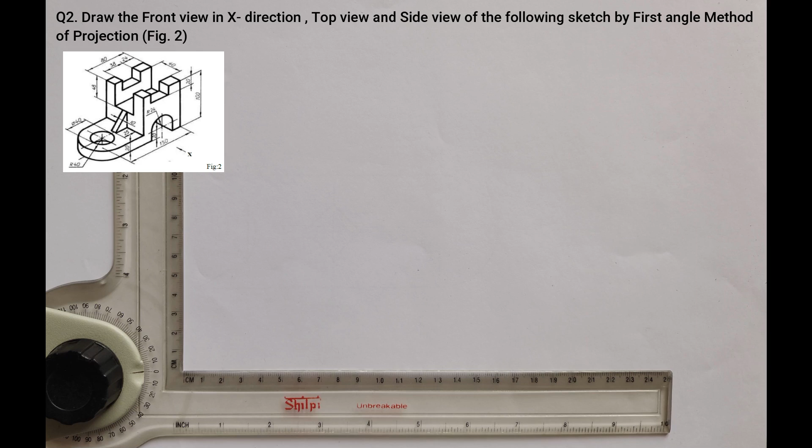As you can see in the question, for this object you will have left hand side view to be drawn, and as per the first angle projection method, left hand side view is always drawn on the right side of the front view.

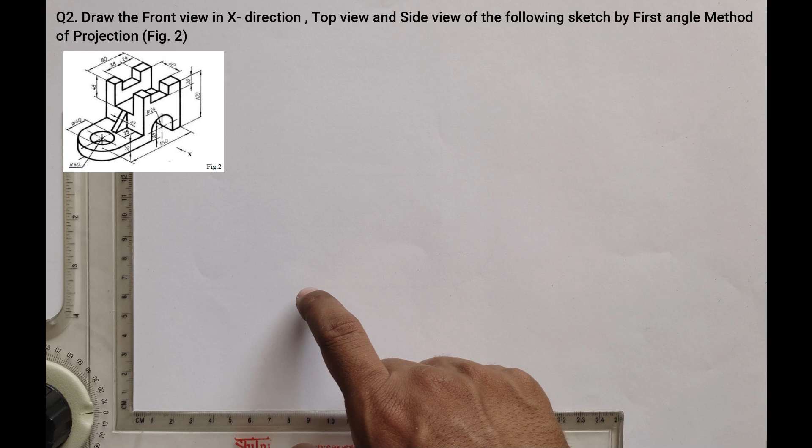So here, before drawing the horizontal and vertical line, you have to make sure you have sufficient space here to take the length and height of the front view. After drawing this horizontal line, you should have sufficient space to draw the width in top view, and after drawing the vertical line, sufficient space for the width, with the height carried along.

So in order to understand this question better, the length is not completely given directly, but you can calculate it from the left center line to the right corner. It is 130 plus 40 mm, which is the outer radius, so it becomes 170 mm. That is the complete length of the given question.

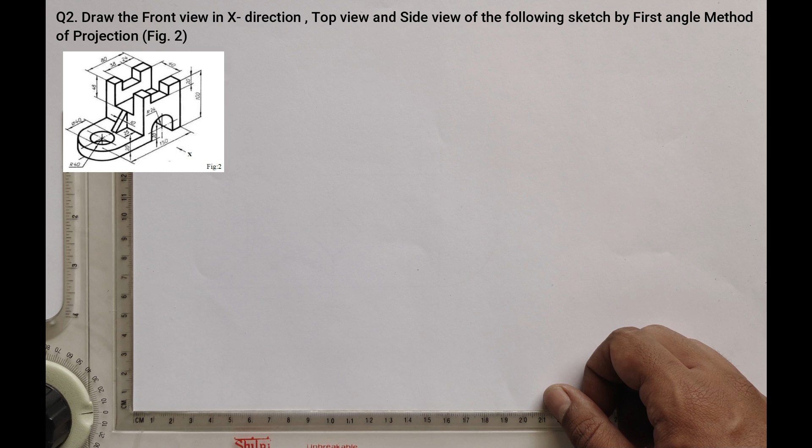The height is 100 mm, whereas the width is 80 mm because of the radius 40 mm.

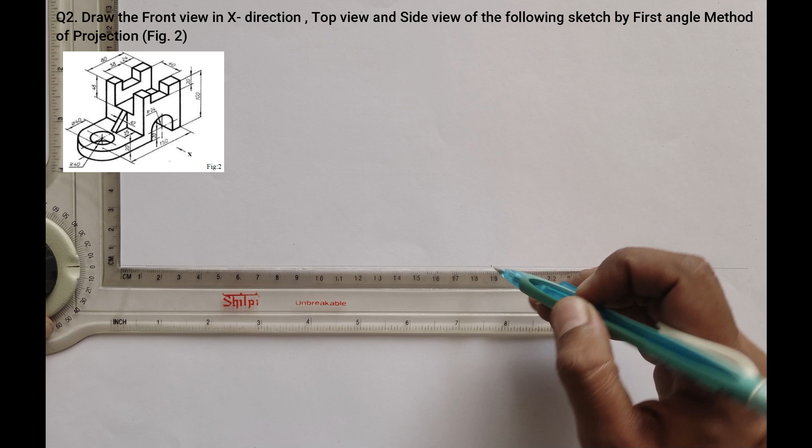So starting with the solution here, you have to keep at least 12 centimeter, that is 120 mm, and draw the horizontal line. Once you have drawn the horizontal line, at least 190 mm should be left on the left hand side in order to draw the front view here. Then drawing the vertical line.

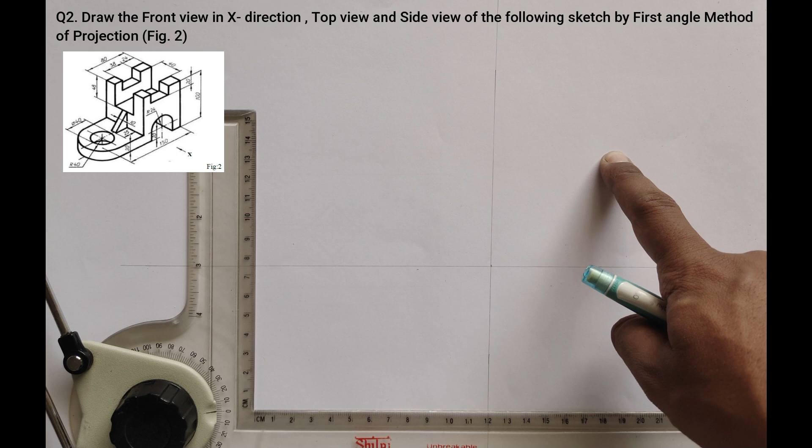So I have drawn these lines. Here you'll have the front view, here top view, and here left hand side view as per the first angle projection method. Now take a common distance from this intersection point on each side, so your front view, top view and side view can easily be drawn.

This distance can be 10 mm, 15 mm, 20 mm, whatever you feel suitable, and can be adjusted on the given page.

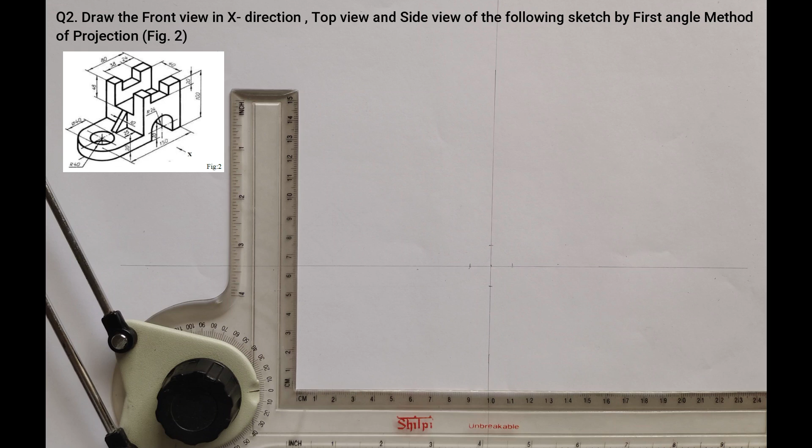So these are the lines which we have drawn.

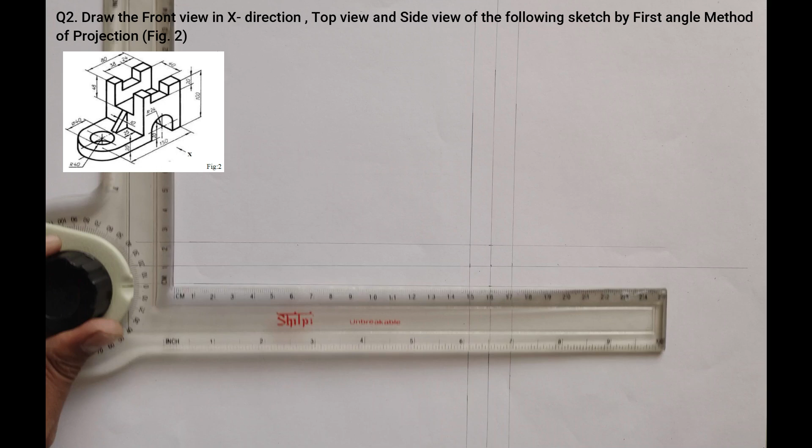Here you have to take 130 mm and locate the center line. After this you have to take 20 mm as the base plate thickness here, drawing it faint here.

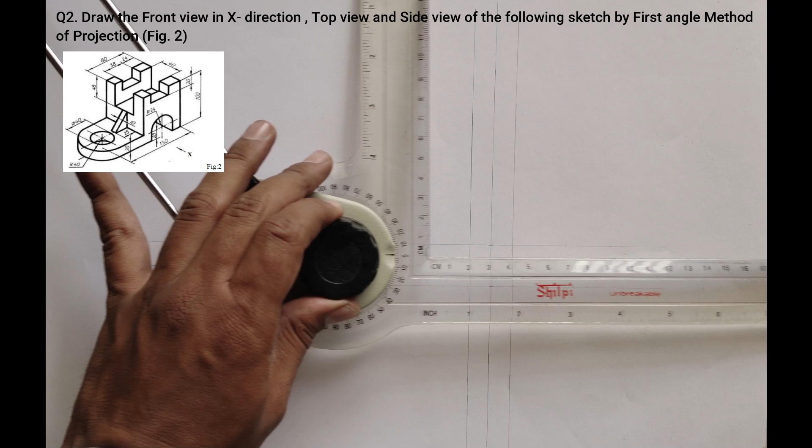The total height of the component is 100 mm, so taking 100 mm here. Up to 100 mm we can make it dark.

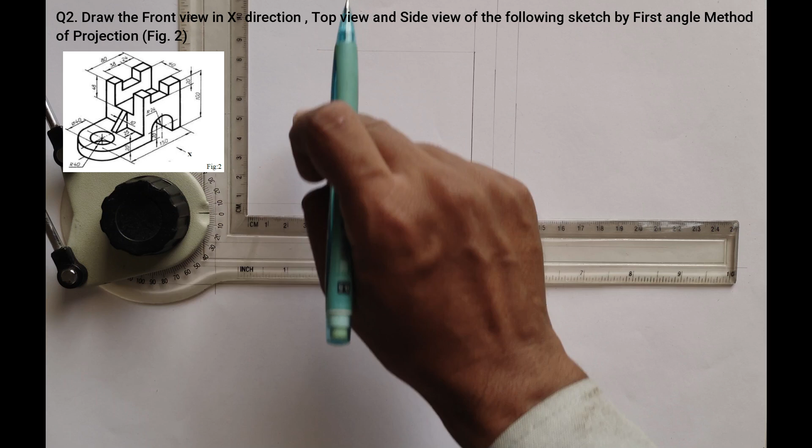Then from there you have to move 80 mm in front, but it's not completely dark, so I'm drawing it faint here, and then it should be dropped here up to the 20 mm base plate, so this can be dark.

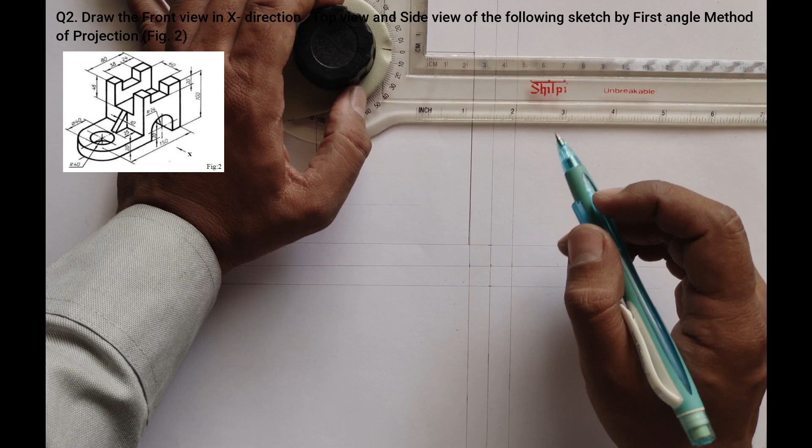Now as far as this portion is concerned, you have to take 24 mm, then you have to drop it by 20 mm as per the given slot here. Then you have to move 38 mm front, closing it on 20 mm here, and the remaining should be dark.

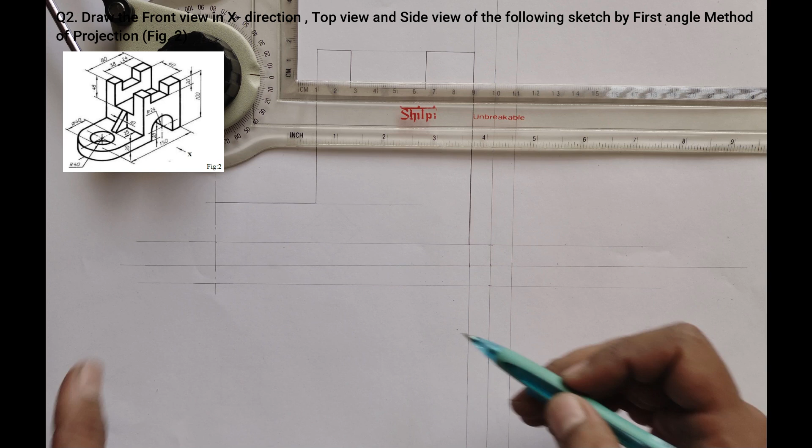Now the semicircular slot here is not having the center at the base, it is 20 mm above, so this is the 20 mm line, making it here the center line, and on this line at the center, that is at 40 mm, you have to draw the vertical center line.

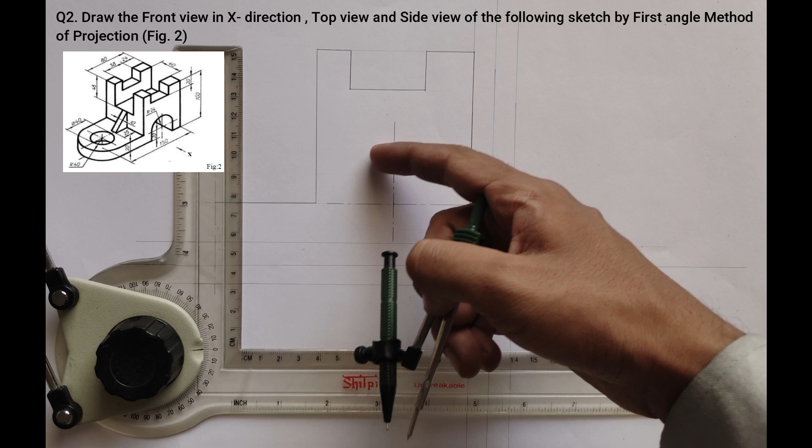Now the radius is given as 24 mm here. We have this 24 mm already drawn, so I'm using this distance as my radius and drawing the semicircle.

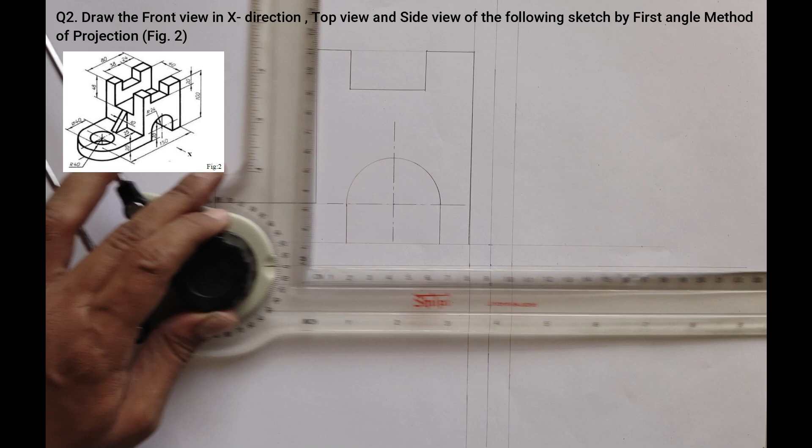Then you have to drop it vertically down till the base plate, and then you can draw the remaining portion dark.

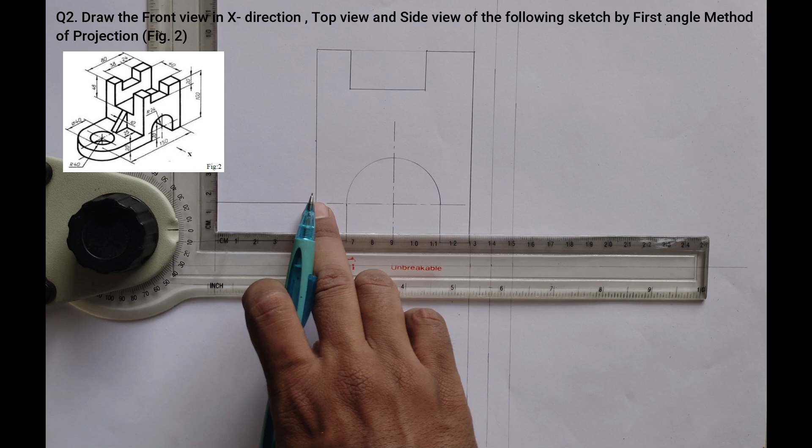Now, here there is a rib given. As you can see, as per the given dimensions, the rib starts from the top. You have to leave a distance of 48 mm, marking the point. And from this corner, it is forward till 25 mm. So from this, you have taken 25 mm.

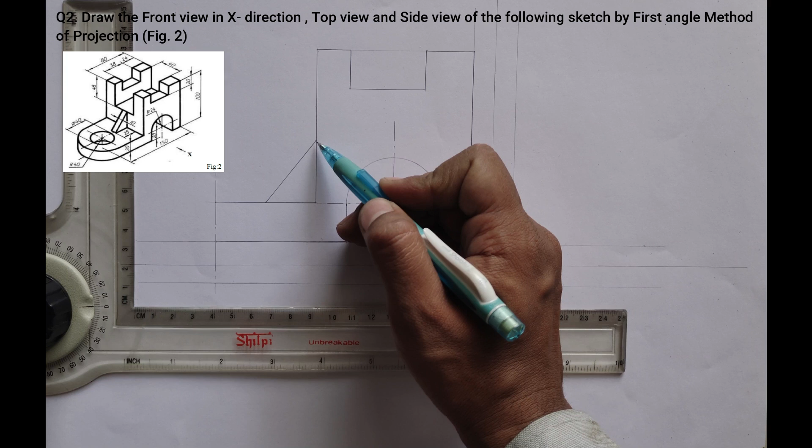This is the point. Now you just have to join these two points, forming the given rib in front view. As you can see, the point where the rib ends at the same location, there is a slot here, so it is not seen in front view. You will have to draw a dash line here.

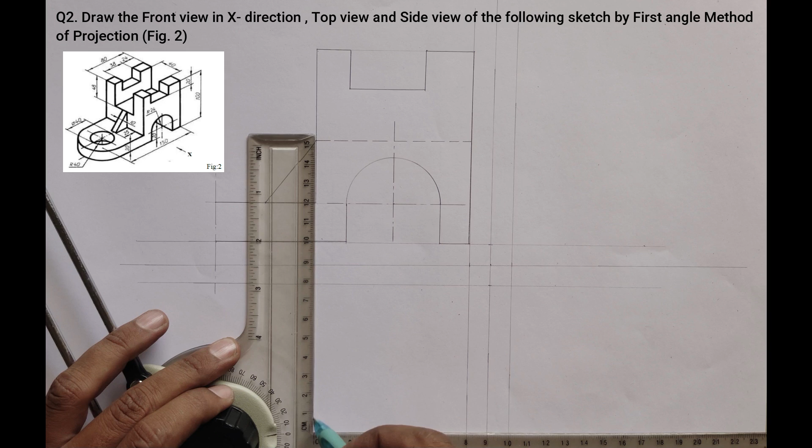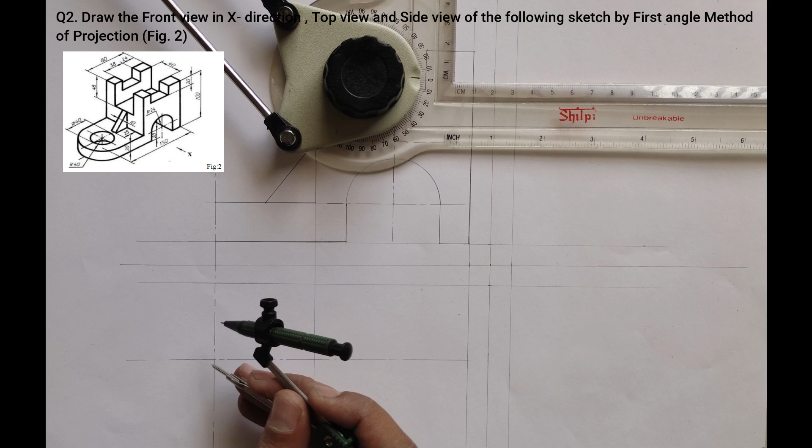For the time being, leave this portion and let us move to our top view. Carrying the projectors down, this is the center line here. You have to take 40 mm distance in order to locate the center line here, so this is 40 mm. You have to take this distance in compass and complete the semicircle here, which will be visible in the top view.

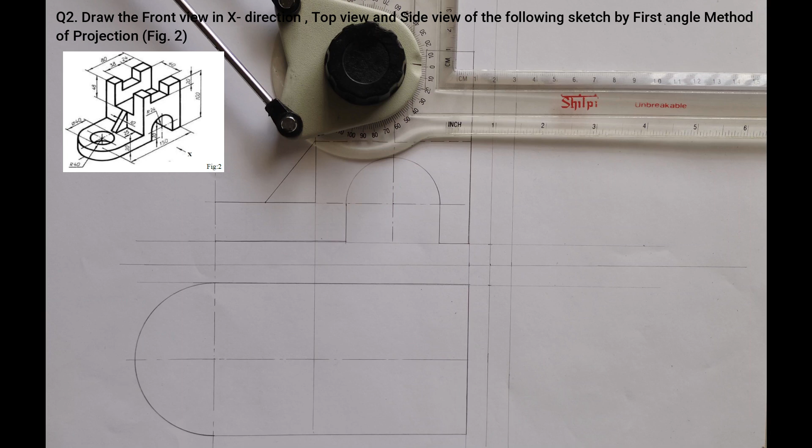Now you can complete this side in order to find the outlines of our given top view. As you can see, at this location there is a circle having a diameter of 40 mm, which means the radius will be 20 mm. This was 20, which we have already taken, so in order to save time, I'm using the same.

Once you have drawn the circle, now we can complete this remaining front view by taking the projectors up.

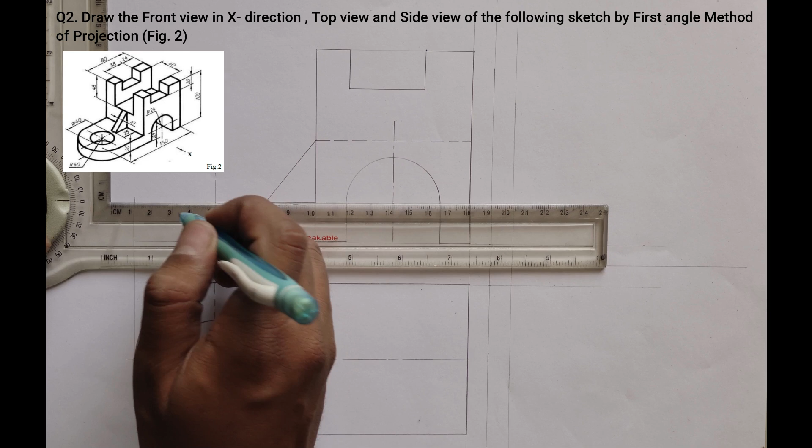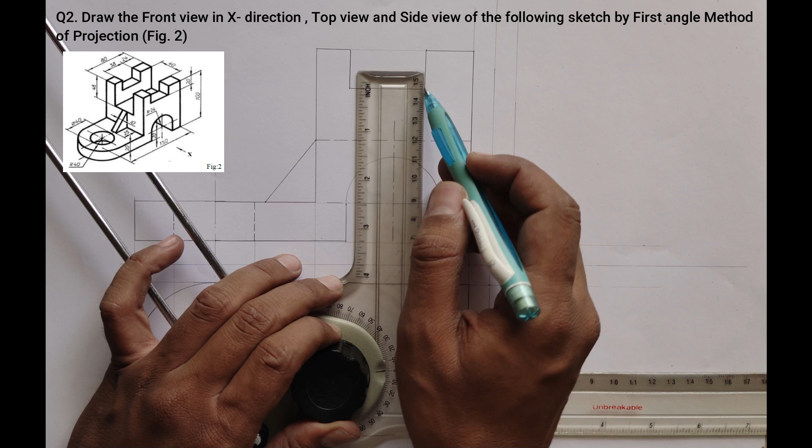Now coming to this portion of top view, as you can see here and here, you will be having some portions as projection. Taking this projectors down, now from the center, the slot width is 40 mm, so 20 mm on each side you have to take.

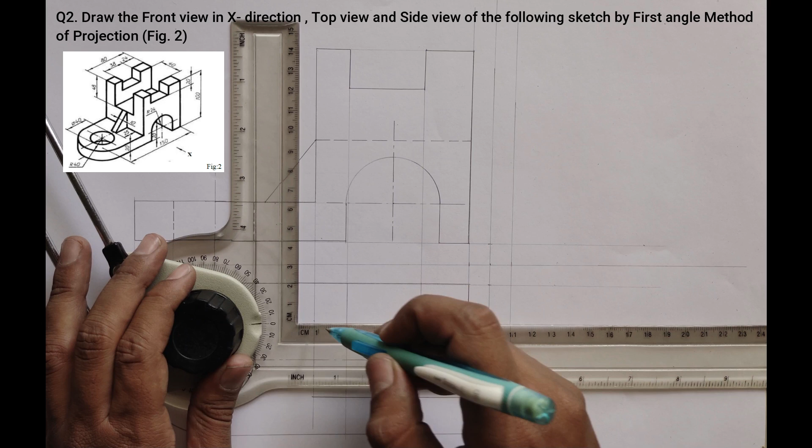This should not be made dark, this should remain faint. Now coming to the rib, it is having a thickness of 10 mm here, so 5 mm on each side, and this is the end point of it.

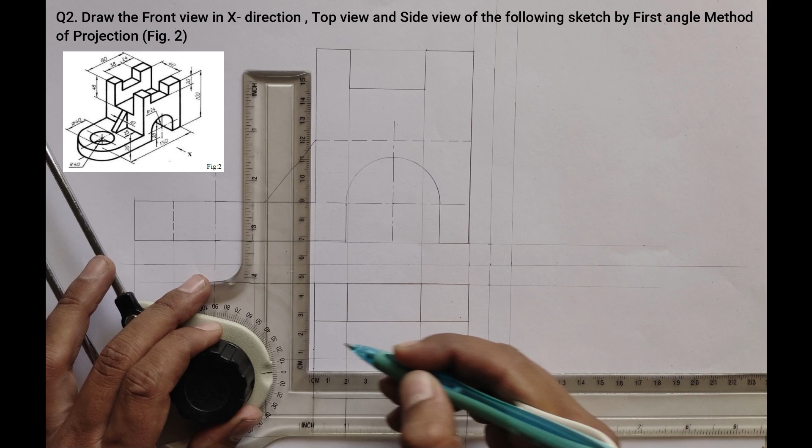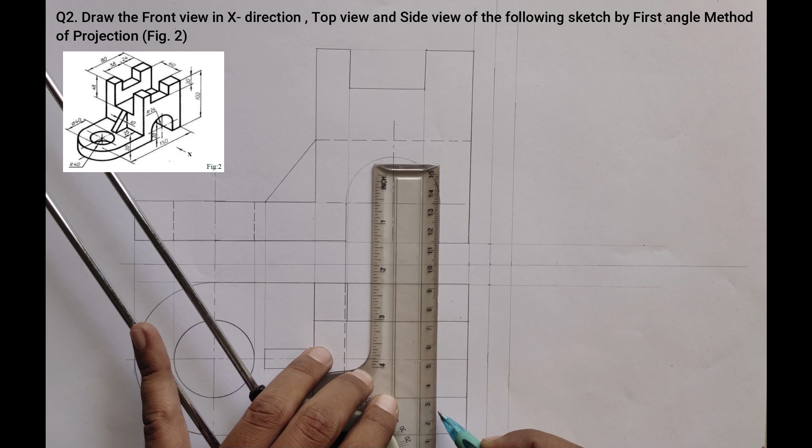Now this semicircular slot will not be seen from top, so it should be dashed throughout. Now this completes your top view.

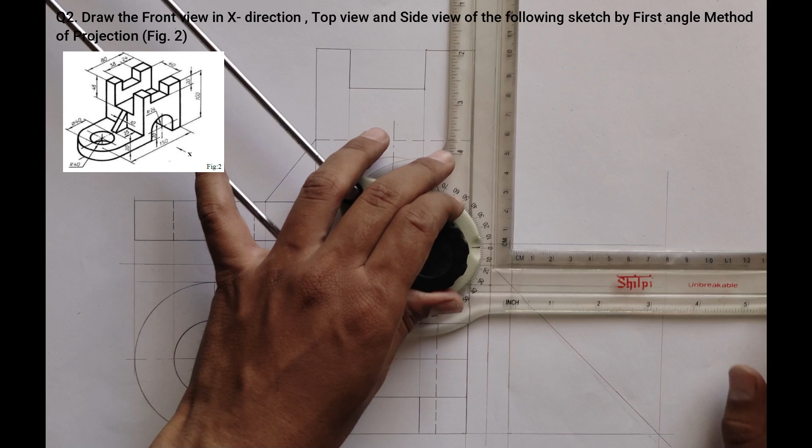Coming to the side view now. You can take an angle of 45 degrees here, taking the height from the front view. So this is the box where you have to draw the side view.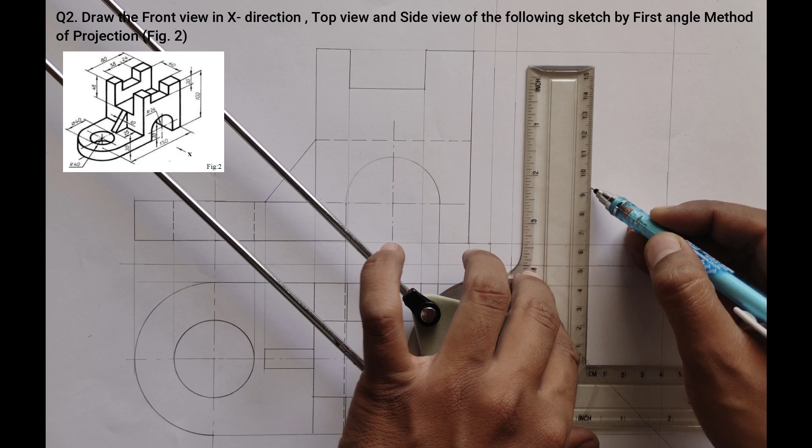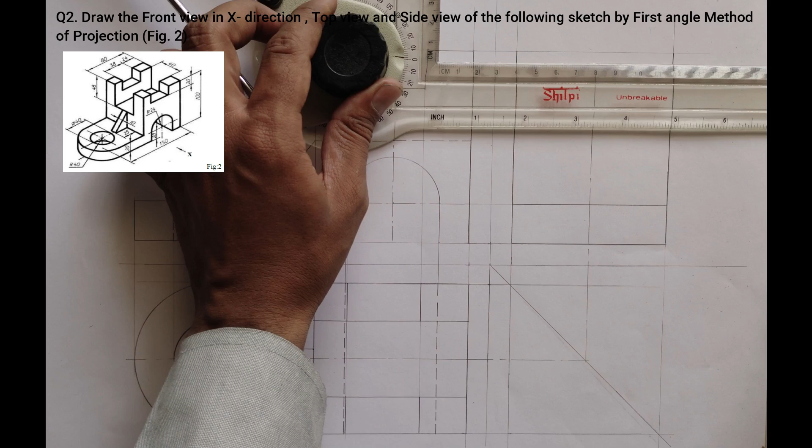As you can see, this base plate will be having dark lines throughout the width, and this vertical line will be dark till the... so for this portion you have to take the projectors from here.

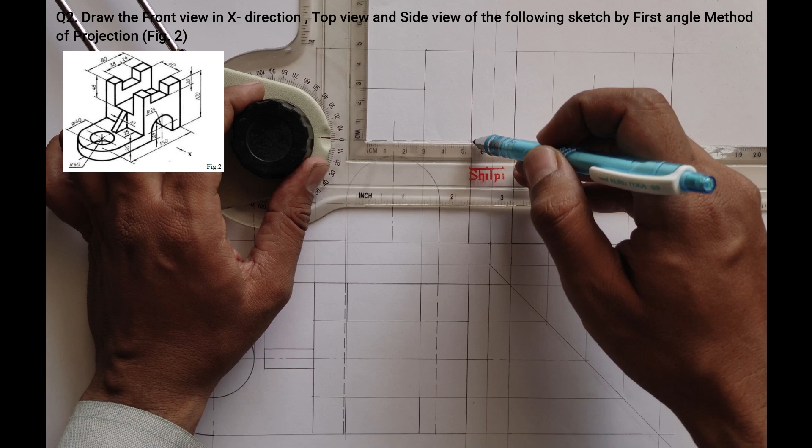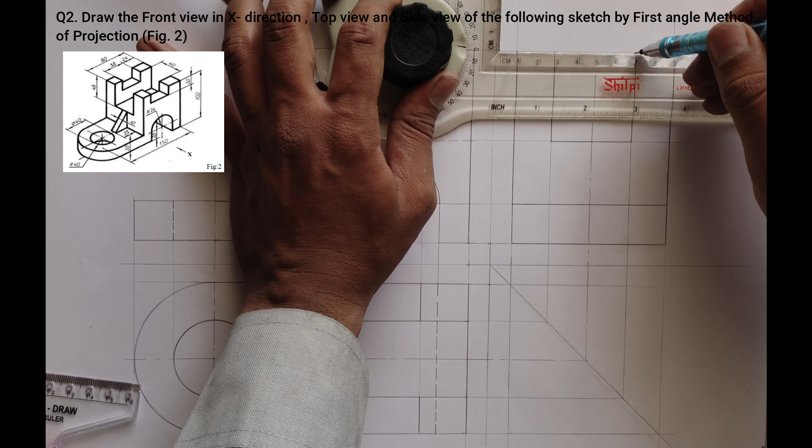These lines should be taken down dark up to the slot. So this is the dash line we are talking about. This is of the slot, so this should be dark here, and similarly this should also be dark. You have to draw this line dark here and the top ends. Now this slot will not be seen from side, so it should be dashed.

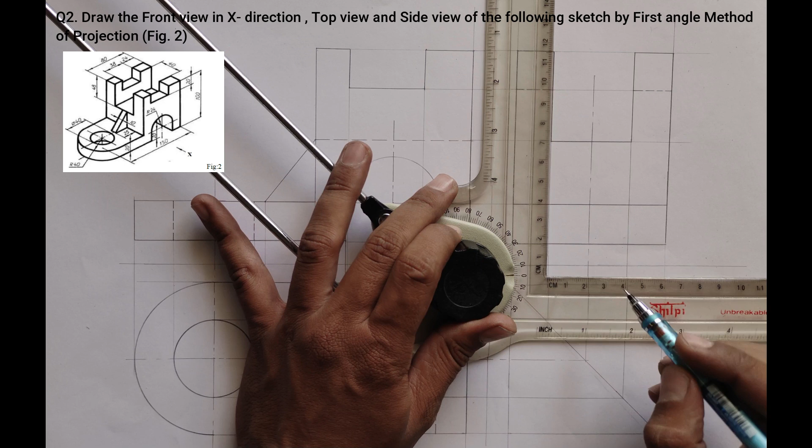So this circle is having a diameter of 40 mm and the slot is also of 40 mm, so it falls on the same projector. Here you have to make this portion as a dashed line.

Now the rib remains, so you have to take projectors of the rib here. It should be starting from this point, ending on this point. So this portion should be dark, the remaining should be faint.

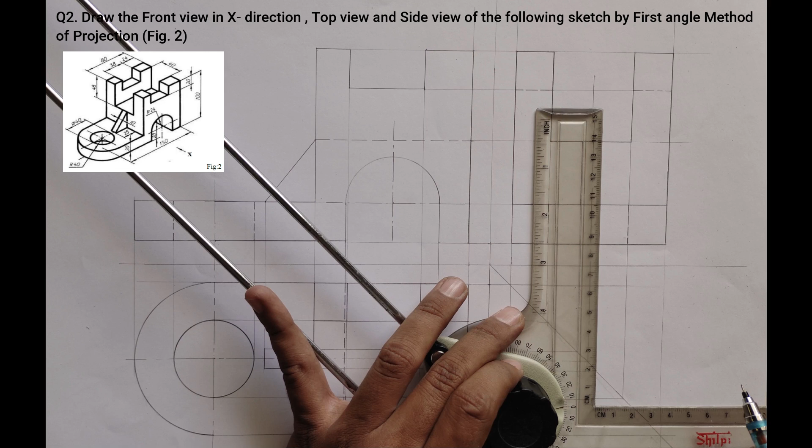Now the slot, the semicircular slot, will be taken from the front view here and it is throughout, so you have to make it dash.

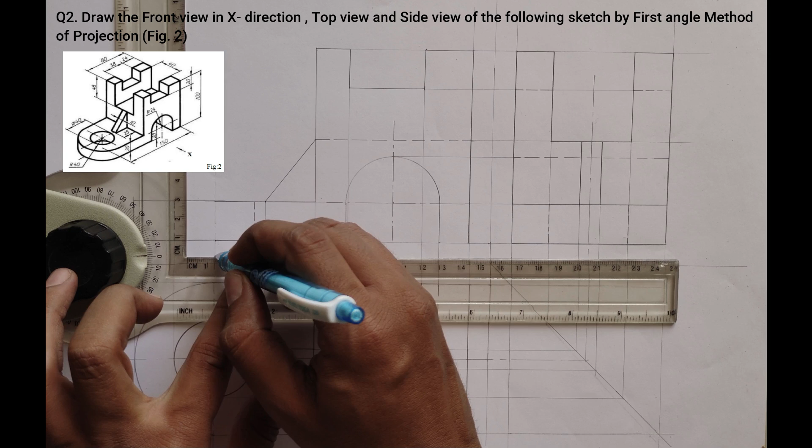This completes the solution. You have to now give the dimensions. Don't forget to give the dimensions as they are given in the question. You have to show only dimensions which are mentioned in the question and do not repeat the dimensions. This is carried as it is, so don't show the same 130 here. Similarly, the height is common here, so give it only once.

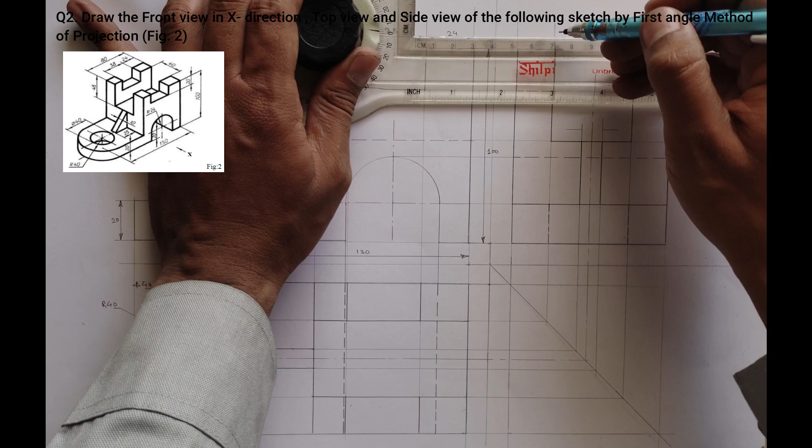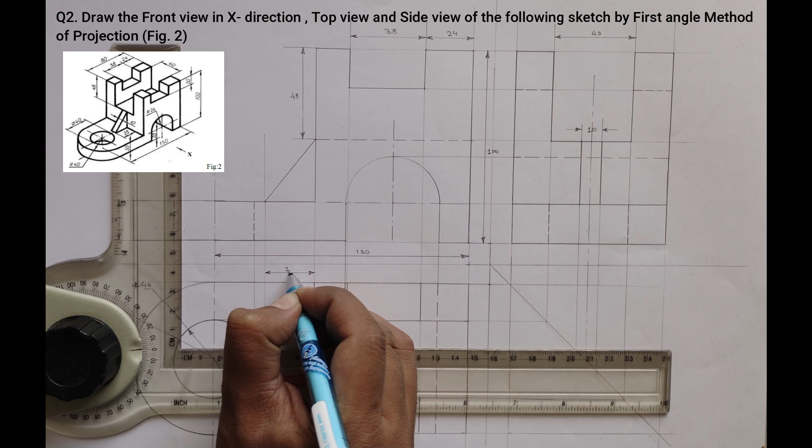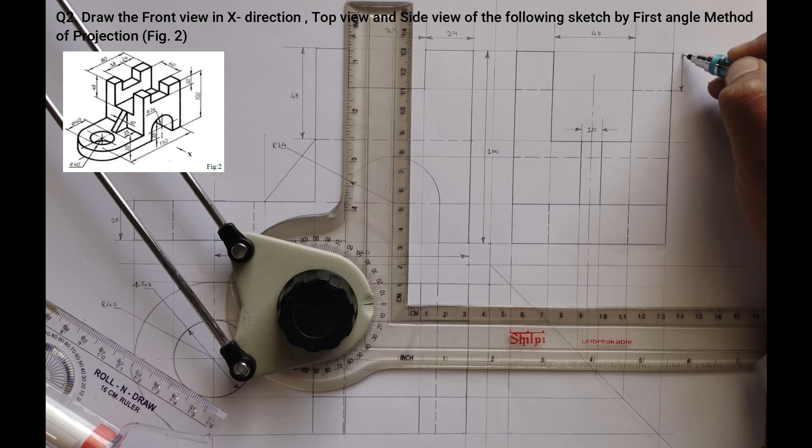Distribute the dimensions. Some of them should be given on front view, some on top view, some on side view. So each and every dimension which was given to us, we have shown it, and this completes the solution.